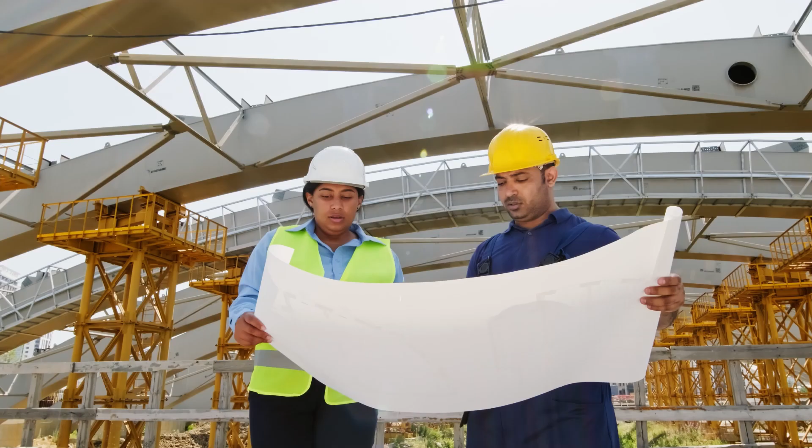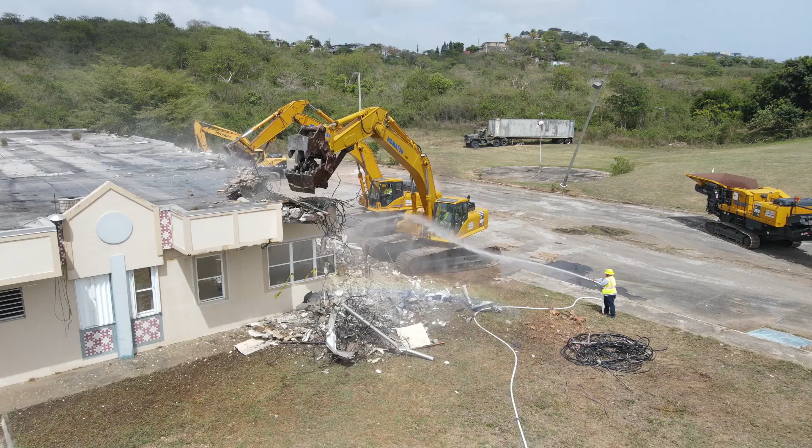We are all human, and everyone knows that humans make many mistakes. But when it comes to mega projects, you might think that engineers and investors have carefully thought about everything, and the project is 100% without mistakes. However, it's not always like that. In this video from Vista, we intend to talk about some billion-dollar mistakes and see why the construction of these mega projects has fallen behind by several years, with costs 3 or 4 times higher. Please stay with us.

Number 1. Citigroup Center Building. This building is located in the center of New York. The 280-meter tall structure has a unique feature. Its foundation consists of only 4 columns, each measuring 34 meters in length. Construction of this building began in 1974 and was completed in 1977.

However, in 1978, a major mistake was identified in this skyscraper. The engineers miscalculated the building's resistance to wind forces. They only considered winds that hit the building's 4 sides but overlooked winds that might impact its corners.

The person who noticed this significant mistake was Ms. Diane Hartley, a civil engineering student at the time. Ms. Hartley pointed out that if a severe wind came, it could potentially break the building in the middle.

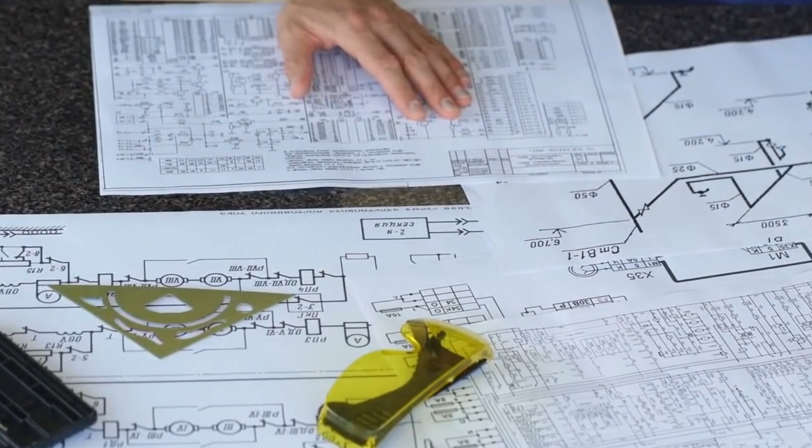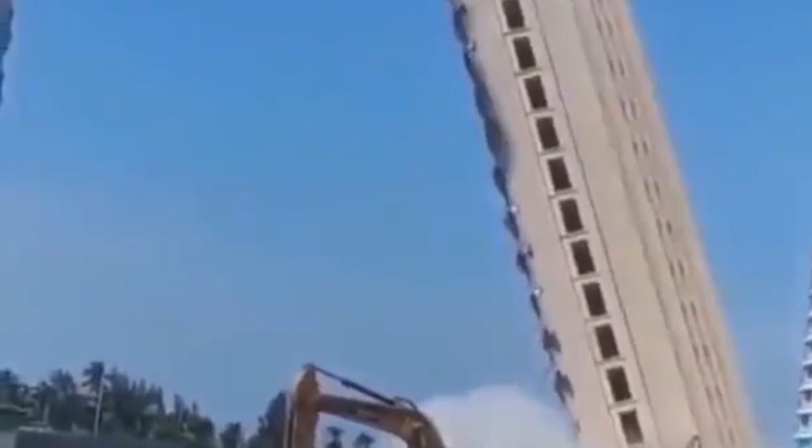After hearing her concerns, engineers conducted various experiments and found that indeed, if a strong wind struck the corners of the building, it would collapse. If the building were to collapse due to wind, it wouldn't fall straight down but would topple onto other towers like a domino, causing extensive damage.

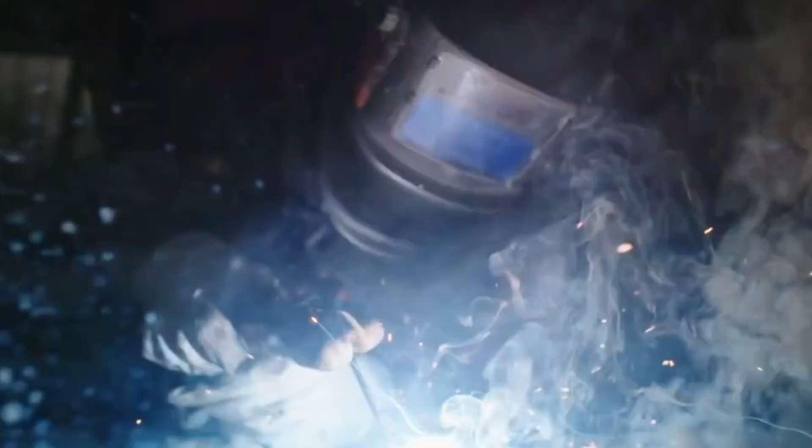When news of Hurricane Ella approached, engineers became extremely worried and quickly began reinforcing the foundation of the building. Fortunately, Hurricane Ella did not reach New York.

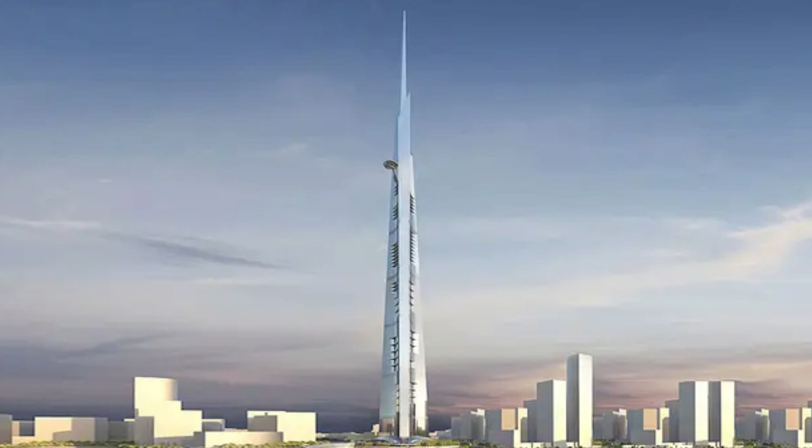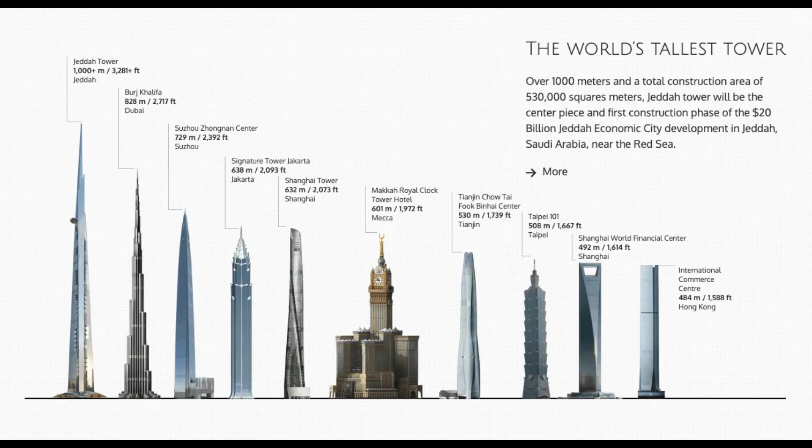Jeddah Tower. This tower, formerly known as the Kingdom Tower, is situated in the city of Jeddah, Saudi Arabia. It was intended to become the world's first 1-kilometer tall tower. The Saudi Arabian government aimed to transform Jeddah into a tourist destination similar to Dubai, United Arab Emirates, by constructing this tower. Construction of Jeddah Tower began in 2013, and it was supposed to be completed in 2018.

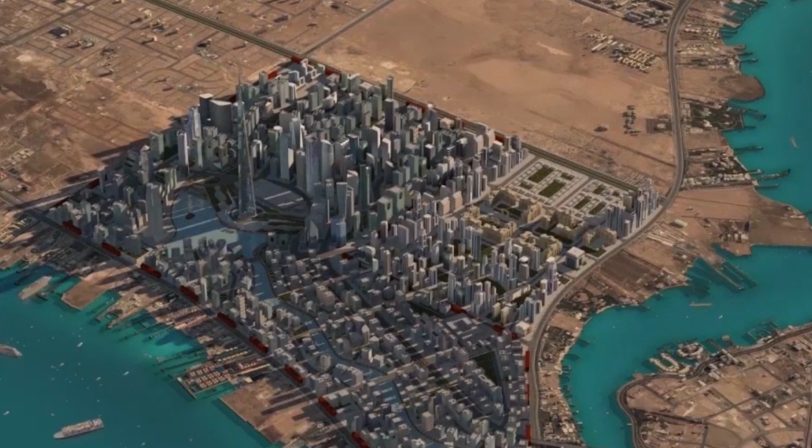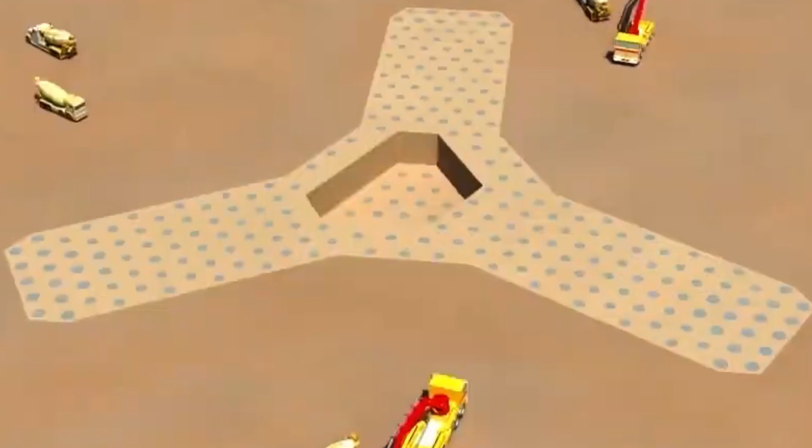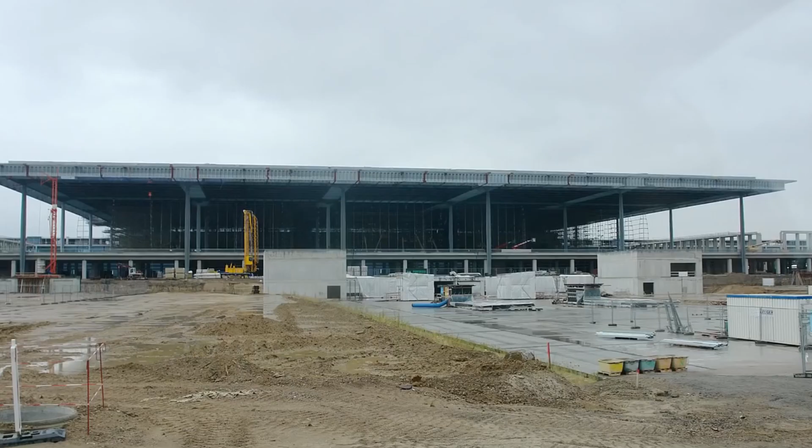Number 3. Berlin-Brandenburg Airport. This project involves the construction of an international airport in Germany. When construction of Berlin-Brandenburg Airport began in 2006, it was estimated to cost around $2.4 billion, and completion was expected in 2011. However, due to financial corruption within companies and other issues, the construction of this massive airport faced significant delays.

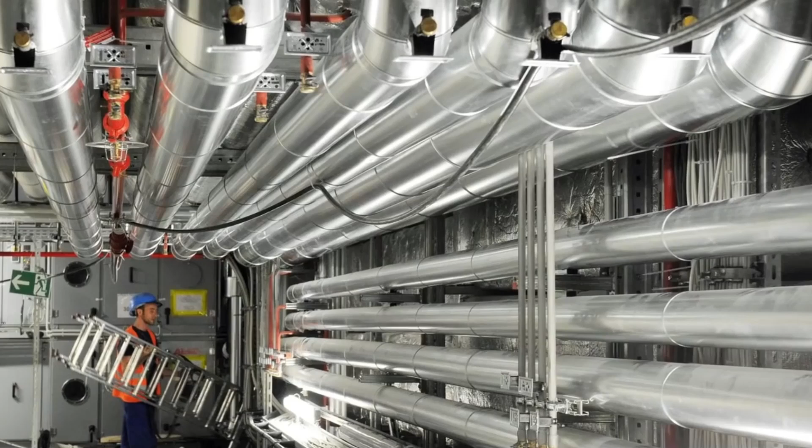The first delay occurred in 2010 when one of the main construction companies declared bankruptcy. The airport's non-compliance with standards also contributed to the delay. For example, the fire alarm system didn't work correctly, and the entire 67 kilometers of the ventilation system lacked proper insulation. The construction cost skyrocketed from $2.4 billion to $8.3 billion.

Finally, in 2020, after 14 years of setbacks, the airport started operating. However, its challenges are not over, as the airport, due to the prevalence of COVID-19, cannot generate sufficient revenue to sustain its operations. To prevent bankruptcy, an additional $2 billion needs to be invested.

Next in line is the Tacoma Narrows Bridge. For this project, we need to go back to 1940, when construction of the Tacoma Narrows Bridge was completed. This bridge connected the city of Tacoma, Washington, to Kitsap Peninsula, and was the third longest suspension bridge in the world after the George Washington Bridge and the Golden Gate Bridge.

However, on a stormy day during the bridge's construction, its first problem became evident. The wind not only swayed the bridge horizontally, but also caused it to oscillate vertically. To prevent severe swaying, engineers installed a series of hydraulic dampers.

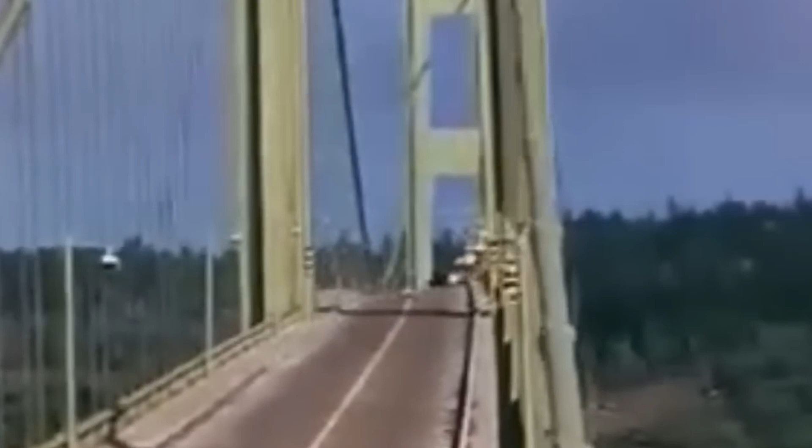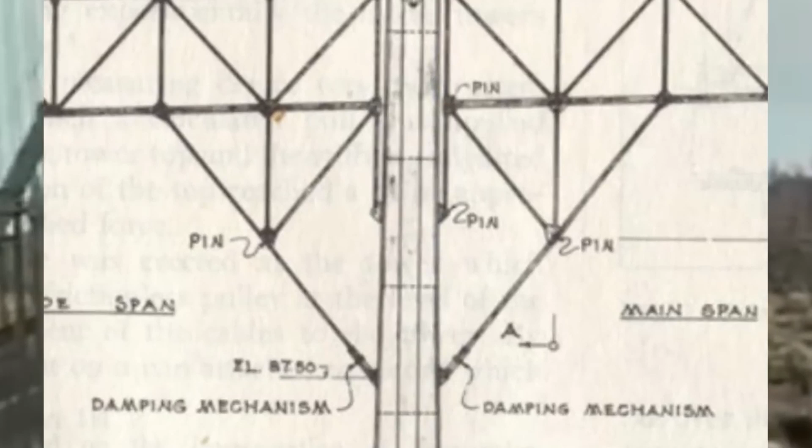On July 1, 1940, the bridge opened to the public. Unfortunately, the engineers' preventive measures were not entirely effective. A few weeks after its opening, people noticed increasingly violent swaying, to the point that many were unwilling to cross the bridge. Some individuals from different cities even traveled to Tacoma, Washington, to witness the bridge's terrifying movements.

Just 4 months after its opening, the swaying became more severe, and on November 7, 1940, the Tacoma Narrows Bridge collapsed. Fortunately, no one suffered serious injuries.

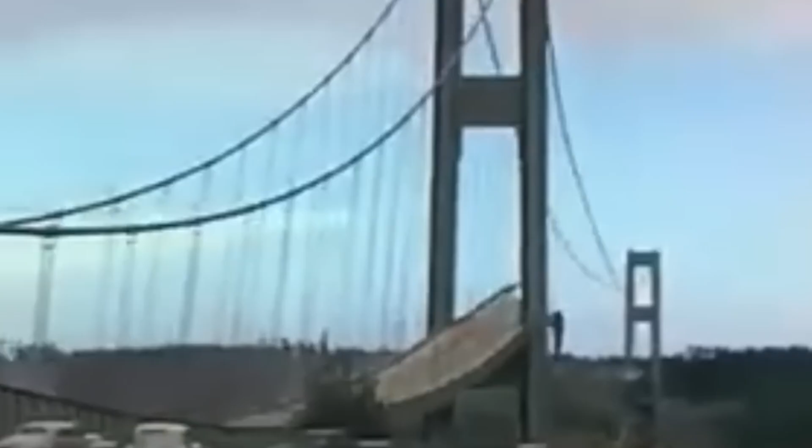After the collapse, engineers discovered their mistake, and 10 years later, in 1950, Washington State built a new Tacoma Narrows Bridge, which still stands today. In 2007, they constructed another 4-lane bridge alongside it.

The cost of building the original bridge in 1940, at today's rate, was around $169 million. The second bridge, built in 1950, cost approximately $170 million. And the parallel bridge, constructed in 2007, had an estimated cost of $850 million.

Number 5. Texcoco Airport, Mexico City. In September 2014, Mexico's president, Mr. Enrique Peña Nieto, announced the country's largest project in the past 100 years, the Texcoco Airport.

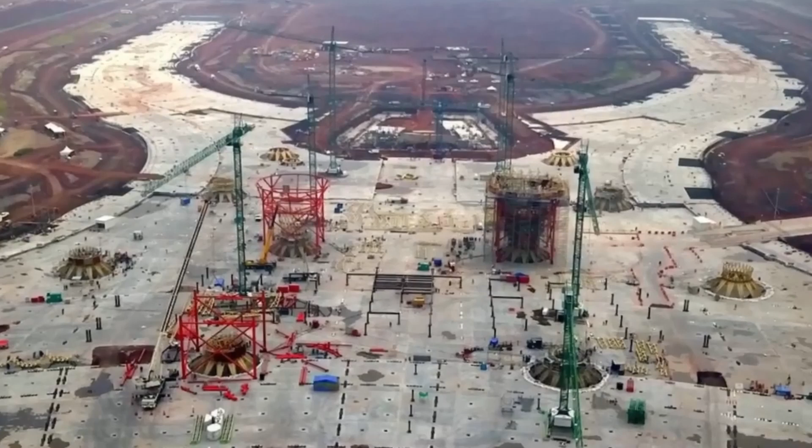The construction began in 2015, but in 2018, with the arrival of the new president, the project came to a halt. The new president, López Obrador, halted the project for a few reasons.

Firstly, he believed that the previous government was corrupt and had pocketed millions of dollars. Secondly, he argued that the construction costs were escalating rapidly. Thirdly, he stated that the chosen location for the airport was not suitable and was sinking.

President López Obrador decided to cancel the Texcoco Airport and build a new, smaller one, claiming it would cost less than completing the first phase of Texcoco.

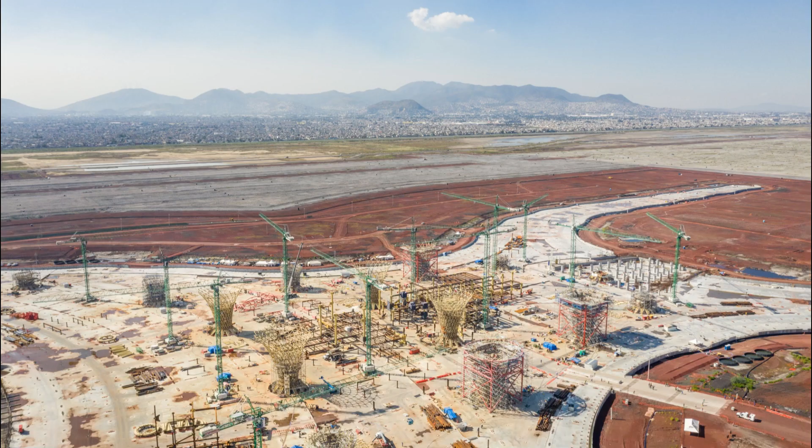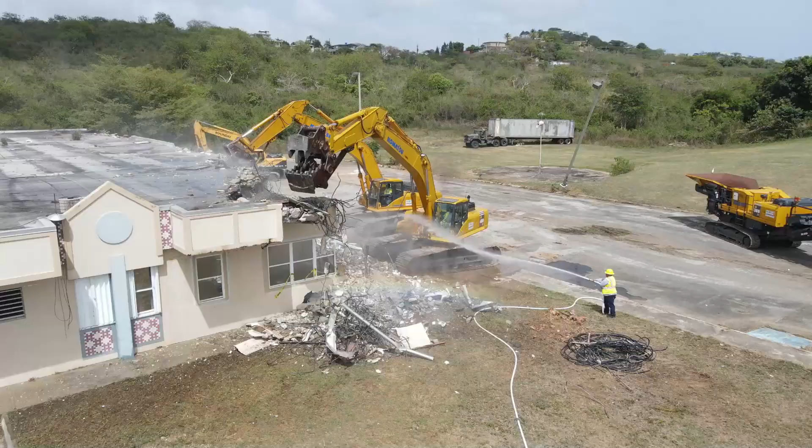After a referendum where nearly 70% of the people voted to cancel the Texcoco project, despite 30% of the first phase being already completed, the new government ordered the complete demolition of the existing structures, turning the area into a lake. The total cost, including construction and demolition expenses, for the Mexican government amounted to approximately $16 billion.

Additionally, the construction of the new airport, which began in 2019 and is expected to be completed soon, is incurring an extra cost of $3.6 billion.

Number 6, and the final one, is Vdara Hotel, Las Vegas. This hotel, famously known as the Death Ray Hotel, captured a lot of attention in 2010. After its opening, many guests using the hotel's pool experienced severe sunburns.

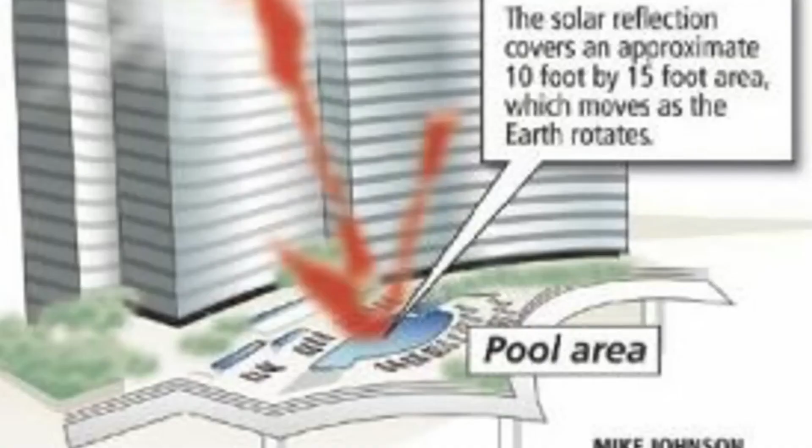The curvature of the hotel acted like a large parabolic lens, concentrating sunlight onto the pool area and raising the temperature of the surroundings to as high as 42 degrees Celsius, 108 degrees Fahrenheit. At times, it became so hot that it even melted plastic water bottles.

To address these issues, large umbrellas were initially placed around the pool area, and a special film was applied to all windows of the building to reduce sunlight reflection. However, despite these measures, many people still suffer from sunburns, and these efforts cost around $14 million.

Interestingly, the architect behind this hotel, Mr. Rafael Viñoly, was also responsible for another of his projects, the 20 Fenchurch Street building in London. The curvature of this building created a similar issue, heating the pavements to such an extent that it caused the plastic components of parked cars to melt.